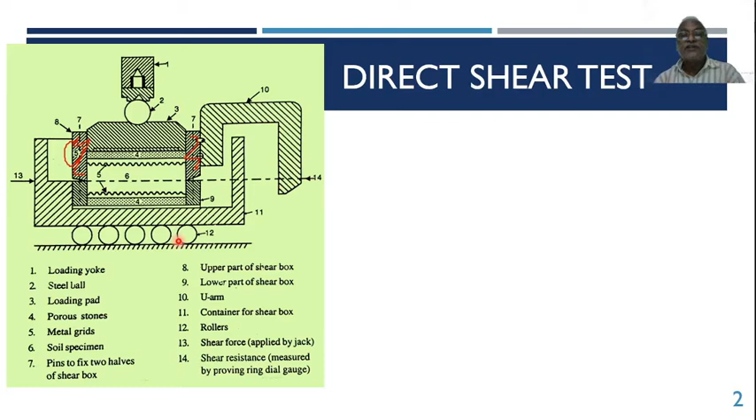And when you apply a force, this is not measured directly. Actually a push is applied, but the resistance to shear is measured at point 14 through what is known as a proving ring. So when the force is applied to move it, we are trying to shear the box, but we are not measuring the force there. We are just applying it gradually so that this slides off, and the resistance is measured at 14. That is the procedure.

Now the same procedure is written in detail, which we'll go through quickly: direct shear test, box shear test. The size of the soil specimen used in the test is 6 centimeters.

Inside the box you have a size of 6 centimeter by 6 centimeter, so the area of resistance across this shear plane is 36 centimeter square, and thickness is about 2 to 2.5 centimeter, 1 centimeter on each side. That's how the shear specimen of soil is used.

The direct shear test equipment essentially consists of the shear box, which is the upper and lower box, the loading yoke for applying normal stress, and the geared jack for applying shear force. This can be geared or pushed manually; there is an arrangement for manual application of the push also.

There is a facility to measure the shear force, shown at 14. The vertical movement and horizontal movement will also be measured through dial gauges. That is essentially the basic arrangement of the shear box test.

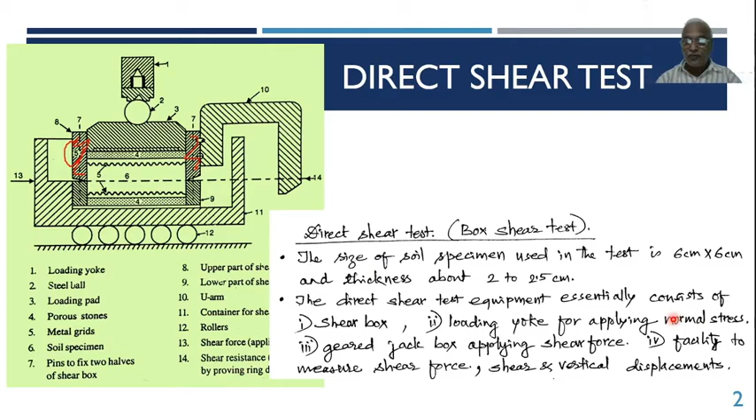The shear box consists of two halves, upper and lower. The lower half is in contact with the shear box container, which freely slides on rollers. This container is applied with a constant displacement. Part 13 is for application of the load, so it is continuously pushed at some particular rate, maybe 1 millimeter per minute or 1 millimeter per 10 minutes. This very slow motion is motorized, or even manual rotational motion with a gear system, so this push is very slow and gradual.

The soil specimen is placed in the shear box such that it gets sheared on the horizontal plane exactly at its mid height. That's how it is placed.

The specimen is sandwiched between a pair of metal grid plates and a pair of porous stones. The metal grid plates are there so that the soil will not slip. That's why there are grids perpendicular to the plane of the board, with serrations or lines that hold or catch the soil so it won't slip.

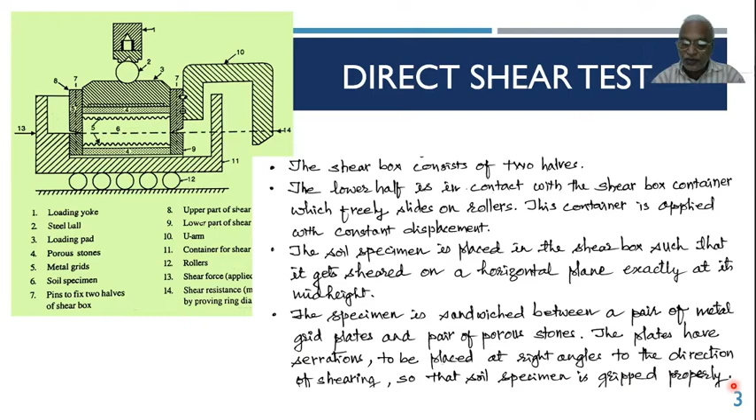For conducting a drained test, generally what is done is a drained test, because whatever wet soil is there, when load is applied, the water directly goes out. You don't have control over whether water is allowed out or not, so it is always a drained test in case of direct shear test. For conducting the drained test, perforated grid plates and porous stones are used.

Perforated means all these plates will have holes so that water goes out through the porous stone and through the plates.

Normal stress is the main part. Normal stress sigma is applied on the specimen and kept constant throughout the test. So when you apply it, there will be application of normal stress of some magnitude sigma, maybe 10 Newton per millimeter square, or some particular value.

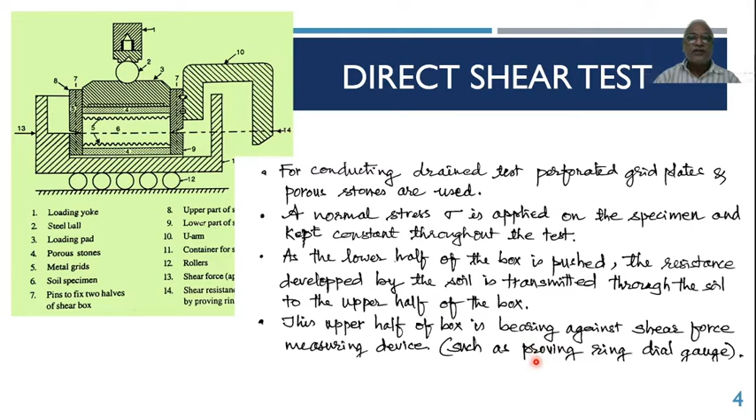As the lower half of the box is pushed, meaning when you apply force at 13 to push, the resistance developed by the soil is transmitted through the soil to the upper half of the box. This upper half of the box bears against the shear force measuring device, shown at 14, such as a proving ring or dial gauge, and the resistance is measured there.

As the lower half is displaced continuously by application of force at 13, the shear resistance also increases until the specimen fails. So gradually the resistance becomes more, because the lower half is trying to move this way, but it is held in position by the force measuring device, which does not allow it to go that way, while the lower half keeps trying to move.

The shear box test can be either strain controlled or stress controlled, but generally it is strain controlled. Here the container and lower box are continuously applied with a specific speed, such as 1 millimeter per minute or 1 millimeter per 10 minutes. That is how the speed is applied, and it is continuously pushed. No force is measured and applied.

Let us imagine we have conducted a test in the laboratory. I am solving the problem. A series of direct shear tests were conducted on a soil with the following results obtained at failure: test numbers 1, 2, 3. The normal stress applied was 15 kilonewton per meter square, and it failed at a shear stress of 18 kilonewton per meter square.

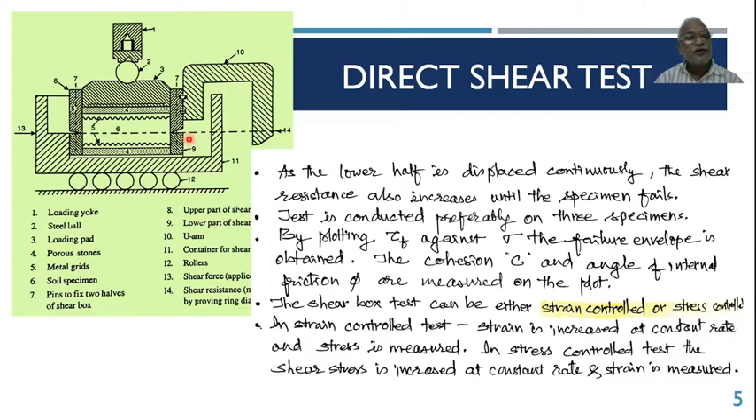As told earlier, you apply some sigma and then measure the shear force. The shear force divided by 36 centimeters square gives you the stress. Similarly, force applied divided by cross-sectional area gives you stress. So those failure stresses are directly given: when you apply 15, it requires 18; when you apply 30, it requires 25, and so on.

Determine the shear strength parameters C and phi. Cohesion and angle of internal friction are referred to as parameters. Draw the Mohr circle and determine principal stresses and direction of principal plane at sigma equal to 30. That is the problem.

Here you have to take some scale because it is a Mohr circle, and normal stress is plotted along the x-axis while shear stress is plotted along the y-axis. I have taken some scale and drawn this in AutoCAD so you can also draw this if you have the facility, or in the examination you have to draw it on a graph sheet. Best is you try on the graph sheet.

Take some scale. Here we have 15 normal stress along the x-axis, 18 along the y-axis. When I measure 15 and 18, there is a point, which I call point number 1. You also get 30, 25 as another point, with coordinates 30, 25. The third point is 45, 32. So I got 3 points.

As far as plotting is concerned, the direct shear test is very simple - you get points like that. You insert a straight line curve. There is no point worrying if there is a slight deviation here and there; approximately you have to fit in a straight line.

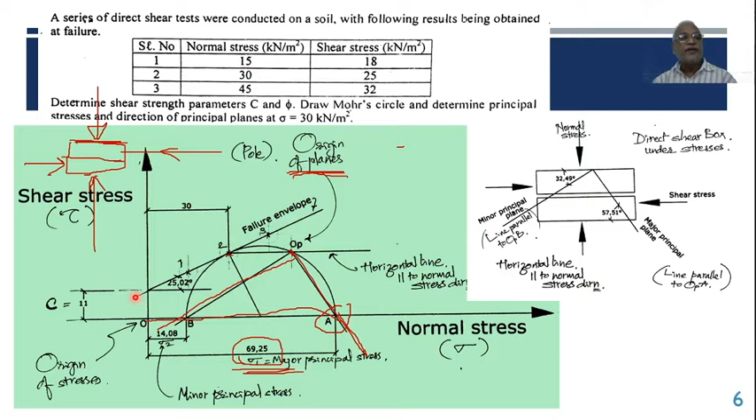So that's how we can do the plotting, finding out C and phi, and also finding out the origin of planes, the inclination of principal plane and principal stresses. Okay.

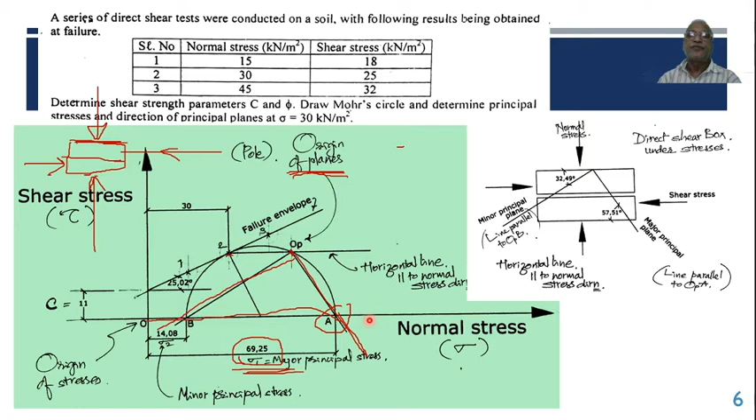Next problem. In a direct shear test on sand, the sample failed at shear stress of 70 kilonewton per meter square when normal stress was 100 kilonewton per meter square. So sigma and tau combination at failure is given. Determine the angle of internal friction. Determine the major and minor principal stresses. Mark the major and minor principal planes on the Mohr circle.

The similar kind of problem, but slightly different. I'll tell you what is the difference. If you start reading, in a direct shear test on sand, when it is sand, this is where you have to take care of the wording.

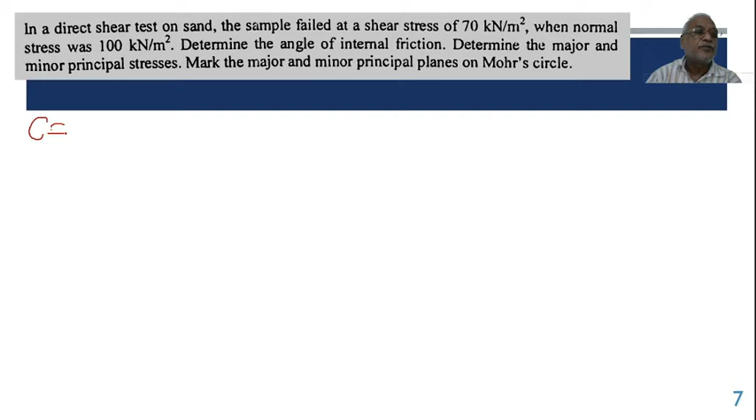When it is said sand, the cohesion is automatically 0, there is no cohesion as far as sand is concerned. So indirectly they have mentioned that C equal to 0. Now they give a normal stress, sigma is given as 100, tau is given as 70, right? Now what is the relation between sigma, tau, C and phi?

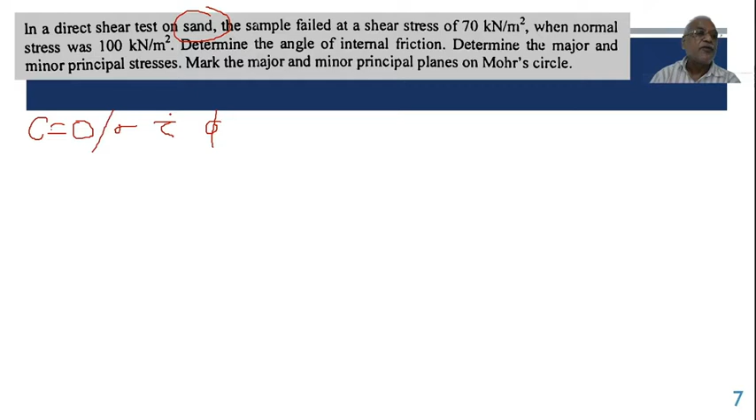You have studied that, so that relation has to be used. We have proved that relation in the last class, that is sigma 3 is equal to Ka sigma 1 minus 2c root Ka, where Ka is a function of phi and it is equal to 1 minus sine phi divided by 1 plus sine phi. Okay, now using that relation one can find, because C is anyway 0, sigma and tau are given, the only unknown is phi. We'll see how to solve it.

Okay, that's how the data is given. I've written the data. It is sand, that's why C equal to 0, tau f equal to 70 when sigma equal to 100, phi is asked. So draw Mohr's circle, major and minor principal planes, and stresses on planes.

Here I'll put this relation: tau equal to C plus sigma tan phi. This is the equation of that line. So when you draw the Mohr's envelope, the equation of this line is tau equal to C plus sigma tan phi. From this also you can find out straight away, because given 70, C is 0, sigma is 100, tan phi equal to 0.7.

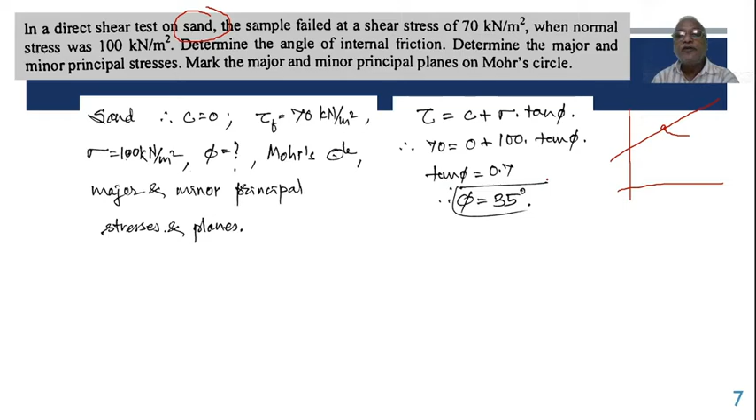Phi equal to 35 degrees. Now even if you draw this Mohr's circle, it will be like this. Now how to draw? Look at this. This is tau axis, this is sigma axis, that is normal stress axis. You got only one point. Look at this, only one point.

At a point, 100 normal stress and then 70 shear stress. I have measured 70 here, 100 on this axis, so that is the point. But C equal to 0, that's why this failure envelope should go through origin. So that's why I can draw this line from origin and then through that point.

Okay, that is how this line is drawn. Now you have to find out the angle there. If you can draw this on a graph sheet directly, you can measure this angle with a protractor. Otherwise, if you are doing it analytically, you can use the geometry over here to find out angle phi. What I have done is I have drawn a line perpendicular to this tangent, which is a radius. So sine 55, what I have written is the angle is 55 because...

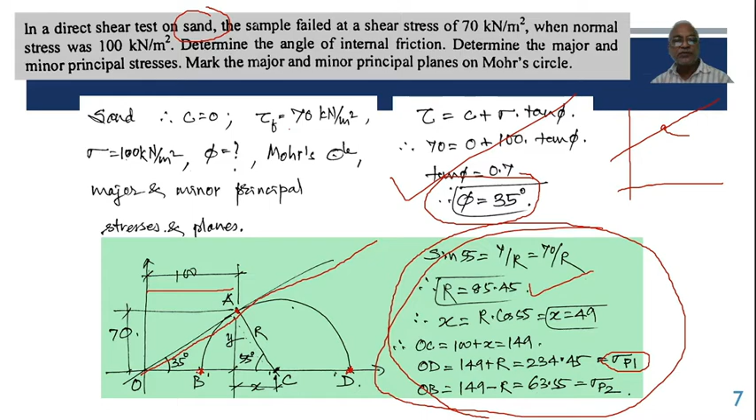This calculation I have done because I have not drawn graphically. I could do it after this calculation with the geometry, but what you can do is plot it directly, measure O to D, that gives you major principal stress, directly measure O to B, that is minor principal stress. That's all. That's how we can solve the problem.

Here I have done that also, graphical method. Taking some scale, I have drawn 70 on this axis, 100 on this axis, the point A is marked, this line is drawn, failure envelope, angle is measured 35 degrees. So origin of planes is found this way because this plane is horizontal. This indicates major principal plane, this indicates minor principal plane.

So when I have measured, it is 234.45 and this is 63.55. So do they match? 234.5 and 63.5 - exactly the same values have come, because I could measure 63.55 on AutoCAD. Otherwise in a graph you can come up to 63.5 or even 63 is also okay. Around 10% error in measuring these values is fine, it can be accommodated.

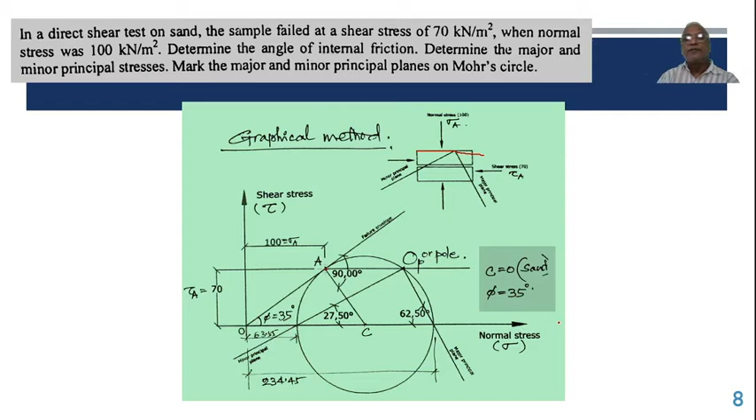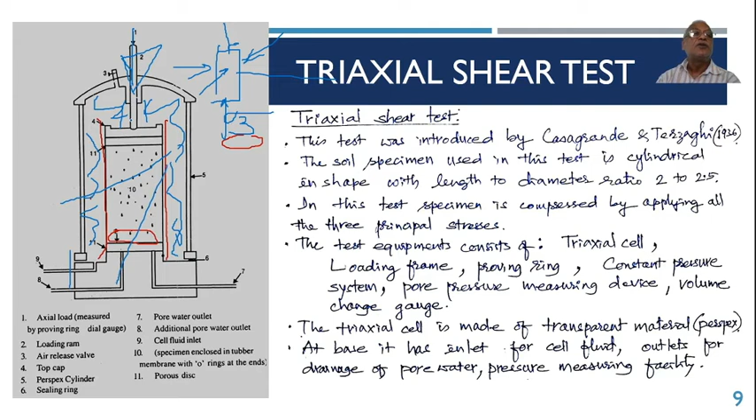Here we apply cell pressure all around so that it is in equilibrium, because when you have a specimen and apply vertical pressure, there will be a horizontal reaction. You apply pressure this way, and exactly the same pressure that way. This is called cell pressure - water is applied with some stress, generally denoted as sigma 3. This is applied and the soil specimen is in equilibrium, but vertically additional load is applied till failure occurs. That is what a triaxial shear test is. We'll see here.

Triaxial shear test. The test was introduced by Casagrande and Terzaghi in 1936. The soil specimen used in this test is cylindrical in shape with a length to diameter ratio of 2 to 2.5. So the diameter D is equal to the height divided by 2, meaning the height will be equal to 2D. That's how the specimen has its dimensions.

In this test, the specimen is compressed by applying all three principal stresses - vertically and horizontally in two ways. All of these are principal stresses because there is no shear stress applied on these planes, on this plane, on the front face - nowhere is there shear stress. So all these three are principal planes.

The test equipment contains a triaxial cell - number 5, a perspex cylinder, so this is the cell. There's a loading frame with a proving ring so you know how much force is applied. A pore pressure measuring device is included, so when you apply the load and close it, there is a facility showing how much load is applied, sigma 3.

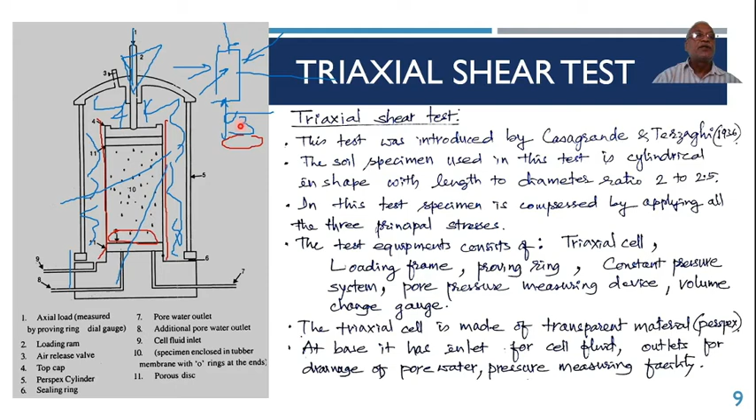Sigma 3 acts on all axes, but vertically, along with sigma 3, delta sigma is applied in the direction of sigma 1 till failure occurs. So the vertical pressure becomes sigma 3 plus delta sigma. That's how I have written here: sigma 1 becomes sigma 3 plus delta sigma, whereas all around it remains the same as sigma 3.

Now with this set of sigma 1 and sigma 3 values, the Mohr circle at failure is drawn. We have got one set of sigma 1 and sigma 3. We have to conduct at least 2-3 tests. Suppose we have 3 tests. For one set of values, sigma 1 here and sigma 3 there, I get a Mohr circle that way.

Let this be test A. Then a different specimen is taken and the test fails for a different set of sigma 1, sigma 3 - that's the second circle, the third circle. You have to draw a common tangent line. Before that, the Mohr circle at failure is drawn for each.

The test is repeated on 3 specimens with different cell pressure sigma 3. Mohr circles are drawn for each of the 3 tests. A common tangent is drawn, which is known as the failure envelope - this line is again a straight line.

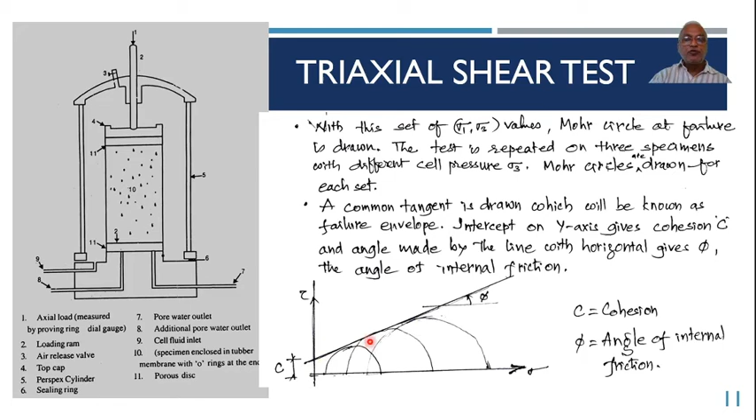The intercept on the y-axis gives you cohesion, C. The inclination of the line with the horizontal gives you phi, the angle of internal friction. So you have to find C and phi. We'll see how to draw the circle with the values through some numerical problems.

Here is one: Determine the shear strength parameters of soil in a triaxial test for the following data, using the analytical method, and check your results by the graphical method. So both methods are asked.

Now what is given as data? There is test number 1 and test number 2. The cell pressure, that is the water pressure applied, is 100. The axial pressure is directly given - they have not given delta sigma as such, but the vertical total pressure is 250, at which failure occurred.

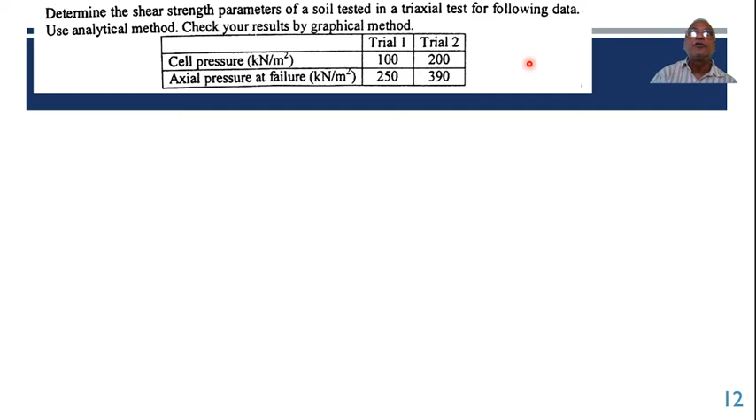Here, when cell pressure is 200, it failed at a total vertical pressure of 390. So this total pressure is sigma 1, and this is sigma 3. There are 2 points with sigma 1 and sigma 3, and we want 2 values, C and phi. We can do it analytically like this.

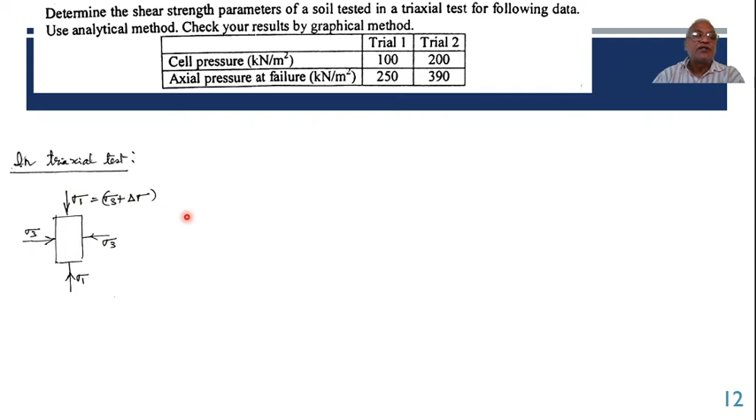In the triaxial test, sigma 3 is the cell pressure shown this way, sigma 1 is this way as sigma 3 plus delta sigma. So sigma 3, delta sigma, axial pressure, deviator stress - that's why sigma 1 becomes sigma 3 plus delta sigma.

The relationship between these principal stresses at failure, sigma 1 and sigma 3, and C and phi, is given by sigma 3 equals Ka sigma 1 minus 2C root Ka, where C is cohesion and Ka is given by tan squared of 45 minus phi by 2, or tan squared alpha. There are two unknowns: Ka is one unknown, C is another unknown.

We know the values of sigma 1 and sigma 3 for two sets, so substituting this test data, first sigma 3 is substituted as 100, Ka is written as it is, and sigma 1 is substituted as 350.

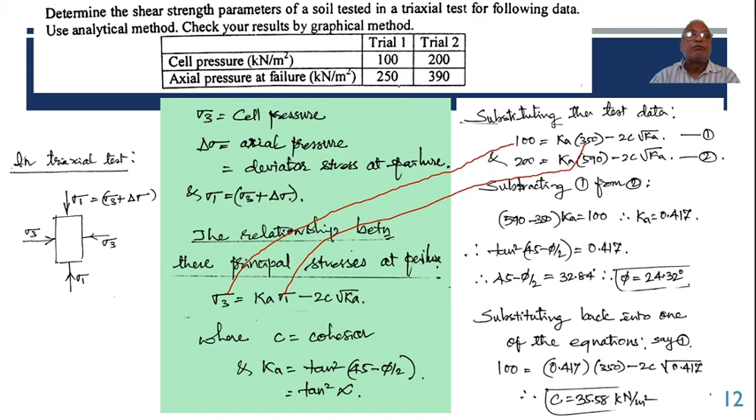Is it right? Because 100 plus 250 I have taken, so axial pressure at failure, this I have considered as delta sigma, so to say.

If I consider this as delta sigma, then it is 250 plus 100, so 350 minus 2c root k, and the second one 200 sigma 3 k, total is 590 minus 2c root k. So here I have considered this as delta sigma rather than sigma 1.

You may take it as sigma 1 also. The ambiguity is there in the data, because of that a little problem is there. So you clearly write what you have assumed it to be. Here it is not very clear, axial pressure at failure. I think it should have been taken as total pressure. Anyway, I have taken delta sigma.

I have further calculated sigma 1. What you could have done is 100 equal to K times 250 minus 2c root K, 200 equal to K times 390 minus 2c root K, which would have given slightly different results. Anyway, solving this, C comes, K comes out to be 0.417.

I think subtracting number 1 from 2: 200 minus 100 is 100. This cancels off anyway. 590 minus 350 is around 240. K is equal to 100. Therefore K comes out to be 0.417.

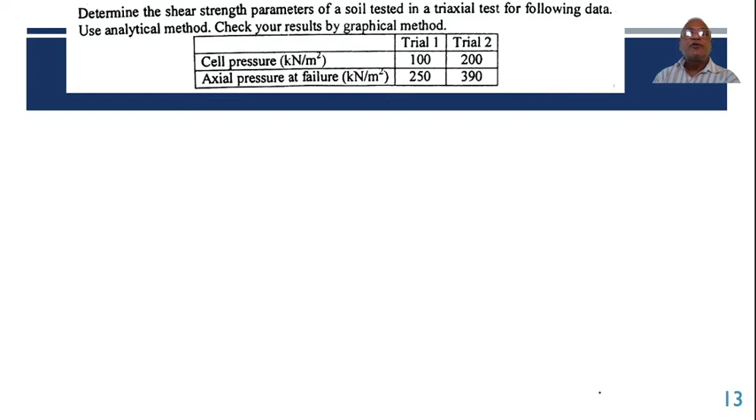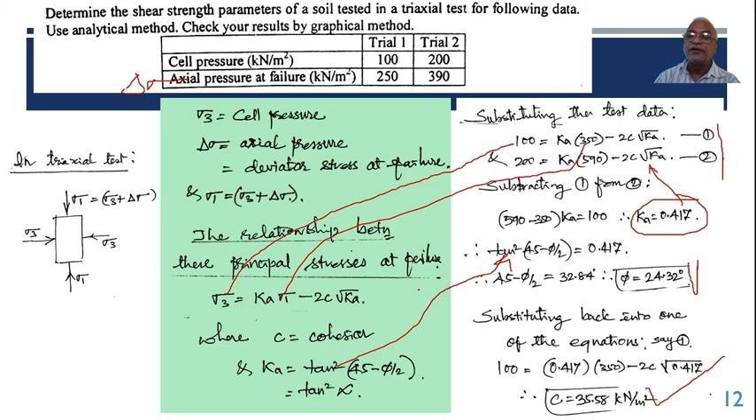For the second trial, 200,0 becomes one point, 590,0 becomes another point. Draw the circle and then draw a common tangent, then measure the angle with respect to horizontal, that is 24.29 degrees, and the intercept on y-axis is 35.58, same as the earlier results we found. So, 35.58, angle is 24.32.

Okay, one more problem. A direct shear test was carried out on a soil specimen and the following results were obtained. What would be the deviator stress at failure if a triaxial shear test is carried out on the same specimen?

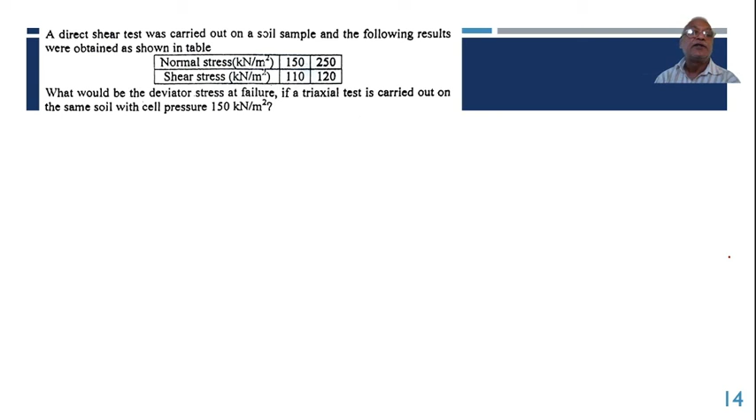Okay, here, because it is a direct shear test, you know that normal stress and shear stress are plotted on x and y axis. 150, 110 is point number 1, so I have drawn 150 and 110, then 250, 120 -- this is 250 horizontal, vertical distance is 120, and the Mohr envelope is drawn.

The angle made with horizontal is 5.715, C is 95. That is finding out C and phi. Now what they ask is, if the test is conducted as a triaxial shear test with a cell pressure of 150, what would be the deviator stress?

Now we'll see it this way. C equal to 95, phi equal to 5.7, then the relation between sigma 3 and sigma 1 is like this: sigma 3 equal to K sigma 1 minus 2C root Ka. Now using this, I can calculate Ka because I know phi: 0.819.

Now I'll take this equation and substitute. Look here, what we can substitute: cell pressure is given, sigma 3 is given, so I have put 150. Then this K is 0.82, sigma 1 is not known, it is shown as it is, minus 2C root Ka. So the only unknown in this equation is sigma 1: 392.75.

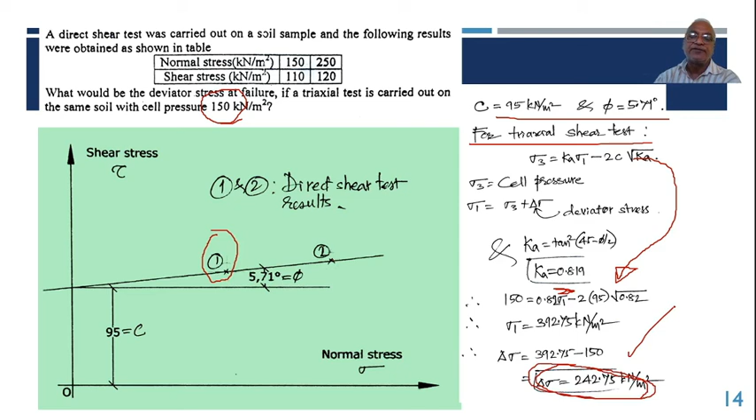So delta sigma is sigma 1 minus sigma 3. That's why delta sigma or deviator stress would be 242.75. Okay, we'll stop here. We'll continue in the next class. Thank you.